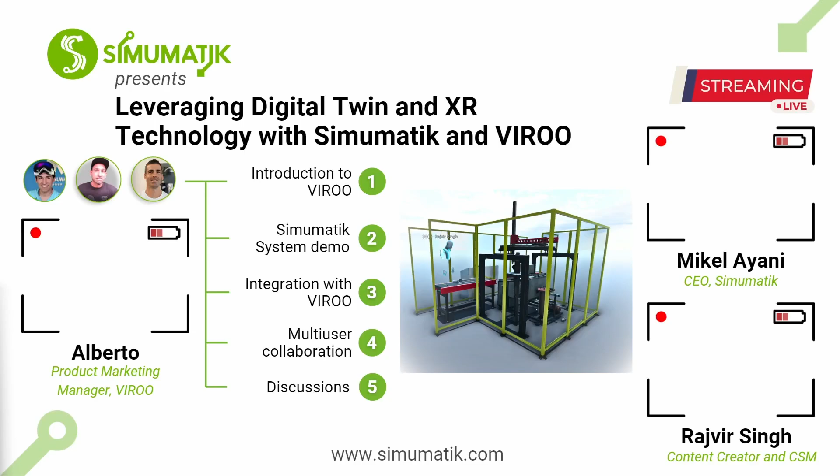Yes, we are live now. Hello, Mikel, nice to see you again. How are you? I'm good, thanks, and how are you? I'm fine, it's been a while for this webinar. We took, I think, 2 months break or 1 month. We also need vacation, right? Yeah, I was on vacation and you were on vacation too.

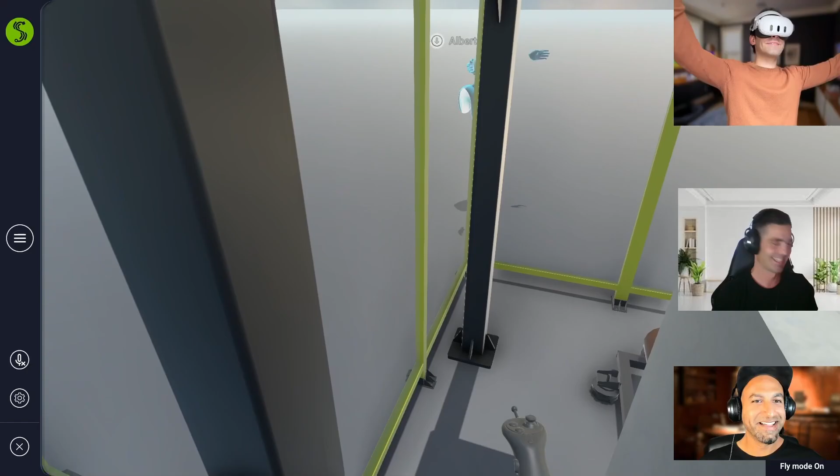Hi guys. Hi, everyone. Can you hear me? Yeah, I hear you. I think you need to disable the audio. Yeah, sorry about that, there's some echo.

Okay, so what you are seeing, everyone, is my screen. So we are in VIROO, a virtual reality application. I see you, Rajvir, as well. So Alberto is the guy we see in the screen and on the top right corner. He's inside using the VR goggles.

Hi, Alberto, how are you? I'm fine, thanks, it's a pleasure to be here. Thanks for having me, and hello to everyone that is going to join live today.

So Alberto, tell us who are you, what do you do for a living? Well, basically, as you said, I have like two lives now. One inside the metaverse, inside VR, but in real life I'm VIROO product marketing manager at Virtualware. We are a company that develops XR platforms for our clients. One of the coolest things that we do is the one thing that we are showing today, the integration with VIROO and Simumatik taking place live here.

And we are gonna tell the details about that later. So I think we can jump into today's agenda. Let's activate Alberto here as well. So Alberto is gonna tell us more details about VIROO. I think we all have our Google's virtual reality goggles - I don't think I'm gonna use them because I need to handle all this webinar thing. But we are gonna have a short presentation from Alberto. He's gonna tell us what we have just seen: an integration between Simumatik and VIROO. Then we are gonna tell a bit more about Simumatik for the audience that maybe doesn't know much about us. And then we are gonna tell the details about the integration, how it works. It's super easy, I have to say, it's super native.

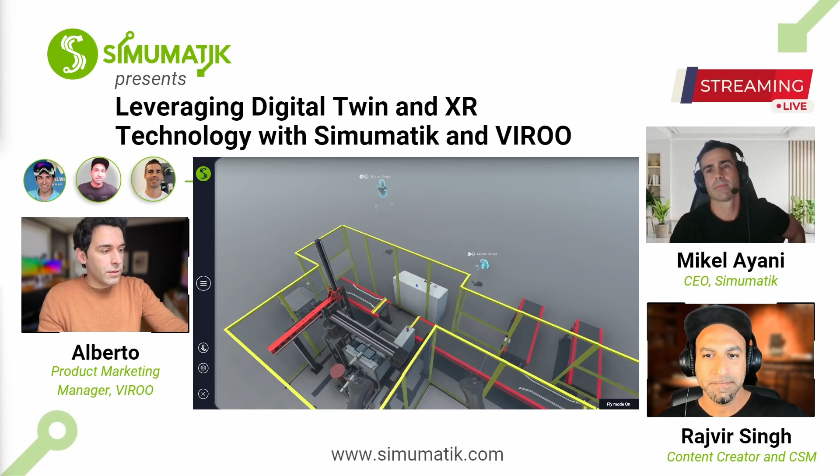Similar way, exactly. If you want, I'm showing you the screen right now because I have a 20-second video where we show when we went compatible with mixed reality. This is using the Vive XR Elite headset, because until now it's the only headset that gives us access to the camera when developing a PCVR application, since VIROO is still PCVR, not standalone.

But we believe other headsets in the market are going to be compatible with this. So what you're looking at now is a 3D model of the car, but the rest is our office. That's really cool because if you're in a large-scale immersive room, you have your partners on the side—it's better to look at them, not just avatars. That's why mixed reality is really cool.

And with the new Vive Focus Vision headset, we're going to be able to deploy this kind of technology to all our VIROO rooms, probably. Cool, nice, very nice.

Anyway, I think the avatars you're using are pretty cool, but what are you expecting in the future regarding the avatars? Is it going to be more advanced? Are we going to be able to see each other as a kind of virtual avatar of ourselves? Where's the technology going?

Yeah, we want to go with really simple, neutral avatars, but our clients could change that if they want, if they go inside Unity, because VIROO is Unity-based. So if you want to create your own custom content, you can go inside and change the entire model. But for many of our clients, it just fits—it tells you if the person is wearing a headset or not, or if he's just using keyboard and mouse.

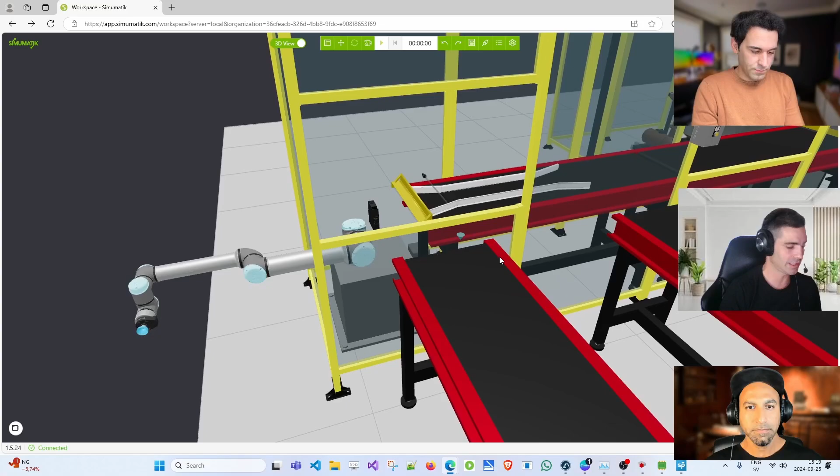Okay, let me share my screen quickly. I think we can go here. Yeah, okay, so this is the environment we just saw before. Here we have a machine that you created, Rajvir. Maybe you can tell us a bit more.

Yeah sure, so this was an extended version of the machine that I created. What's happening here, you can see on the right side we have an entry conveyor. If you can zoom it a little bit, that's where the product... Maybe actually we could go to...

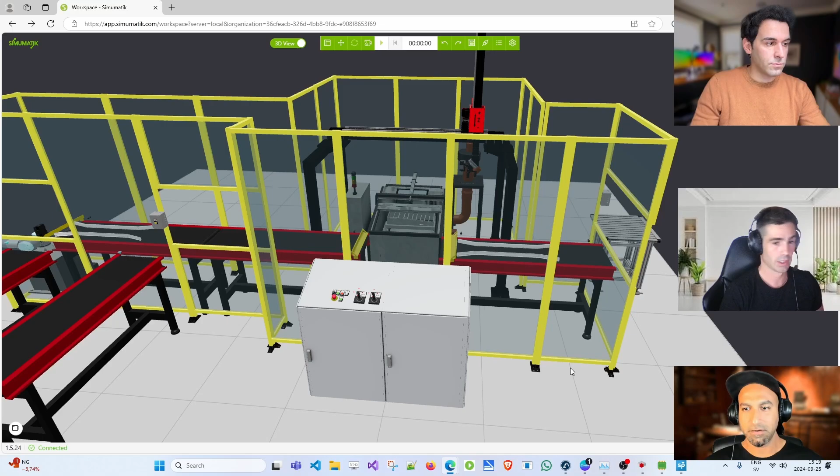Oh okay, yeah we can go to the virtual room, yeah, and we could do it, let me see. I jump into the session, and then we can see you while you are giving us a full tour. You can stand next to me and listen, so we can explain later the connection. Sorry, I need to mute the echo.

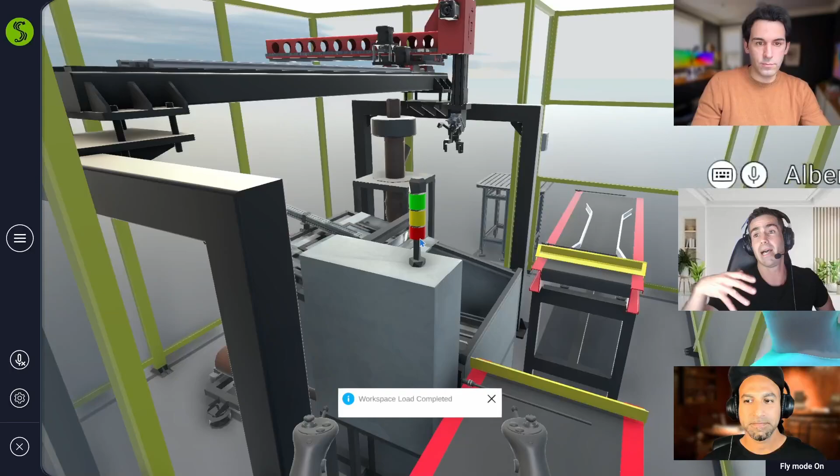Yeah, okay, so what you are seeing basically is how easy I just did it. We are going to tell the details later, but now the VIROO app, the VIROO Simumatik app, is just connecting to the workspace and showing what we have there. As you see, I'm sitting in my office and I don't have any VR set, but I can be inside, I can see you guys. I use the typical WASD keys on the keyboard so I can move around, and I see Alberto, I see you as well.

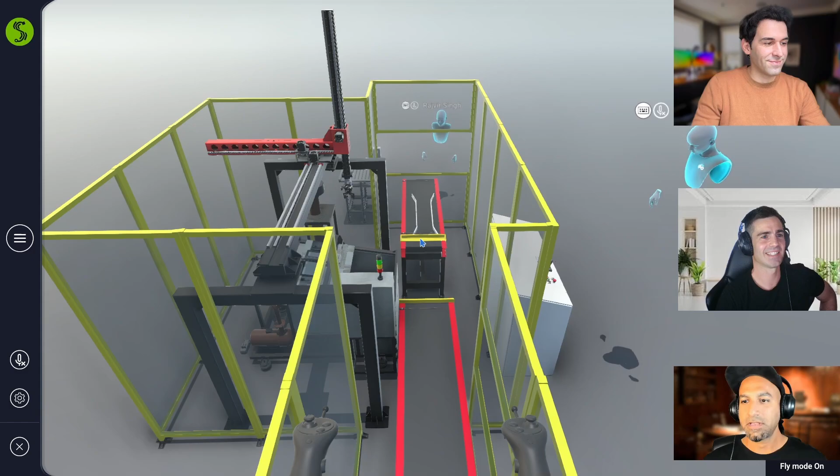So yeah, Rajvir, go ahead, we see you around now. So you can see my position here is basically the entry of the system where we have the products coming in. I will just come inside. You can see a sensor, which is just to sense the product and start the sequence.

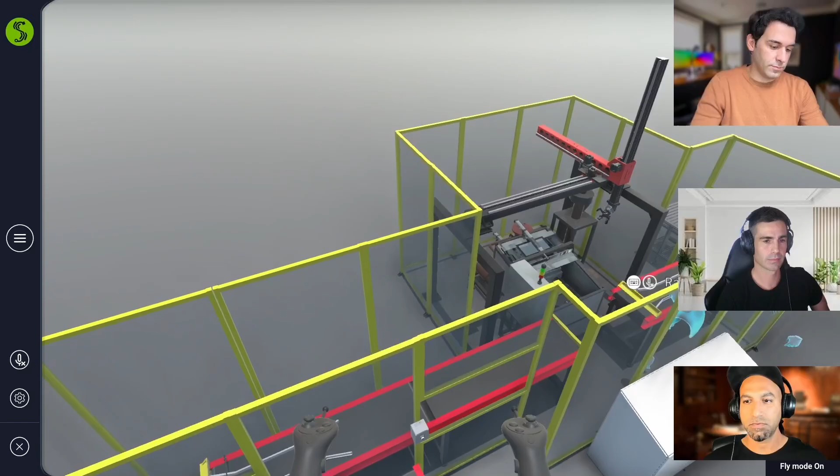And then here you can see the XYZ gantry, and this is used to wash the product. So products are coming here in the sensor, and then the product is picked, placed in the washing machine. There is a timing sequence which is going to wash the product, and then this gantry will pick that again, place it on another conveyor, and that will go further.

And here on the left side, we have a small window, it's for user inspection, it's just optional. If a user wants to pick the product and check by himself if it's okay, he can take it. Otherwise he can also place it on this conveyor, and if he doesn't want to take the product, he can let the product go.

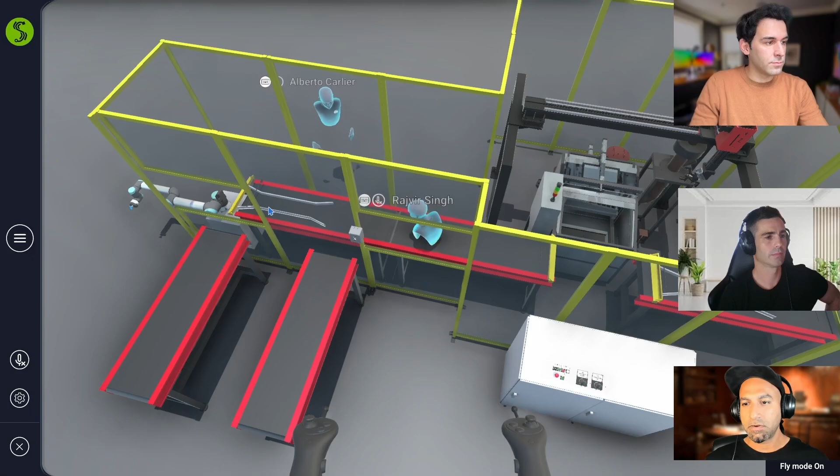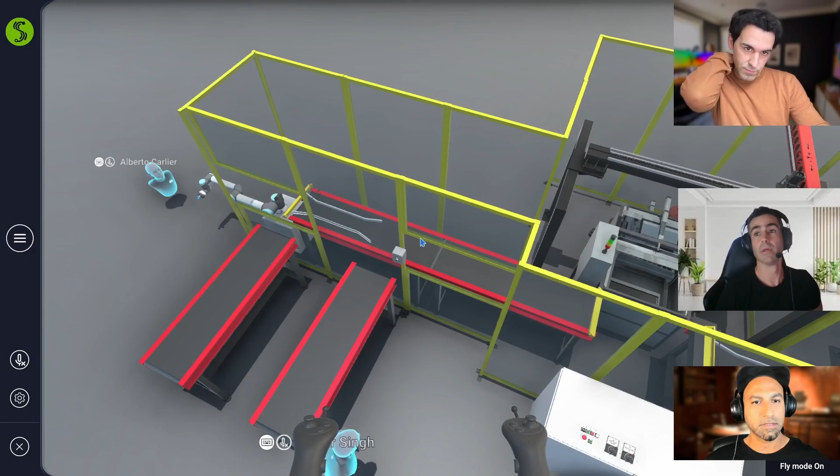And in the end you have a UR robot which is going to pick and place a product in a box, which will appear when we start the system. So maybe you can start the system, and then you can see everything. So I don't have the controls to interact with the workspace here.

But I can go to Simumatik, and here you see basically the same. Actually, let me show you this again, and then I think I can do like this. We can see it's basically the same. I don't see you guys in Simumatik, but we are seeing exactly the same thing.

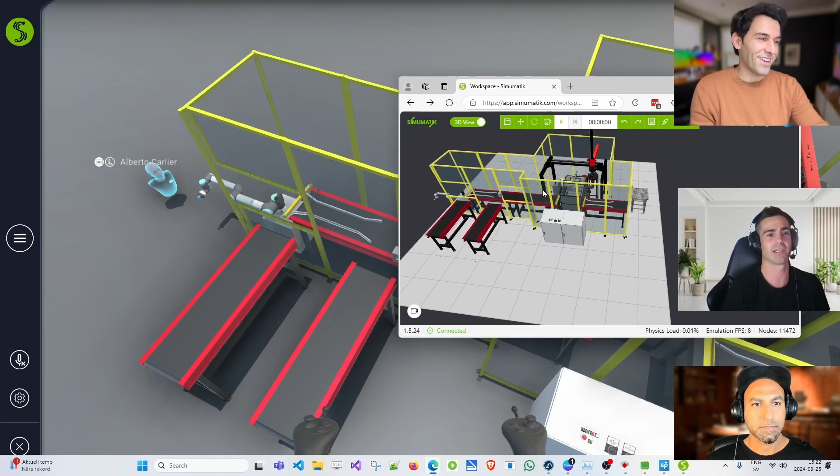Right, so what I'm going to do is I'm going to run, I'm going to start the PLC. I think we actually had a webinar about this before, so I'm not going into the details, but the PLC is controlled by Codesys, so I just downloaded the code.

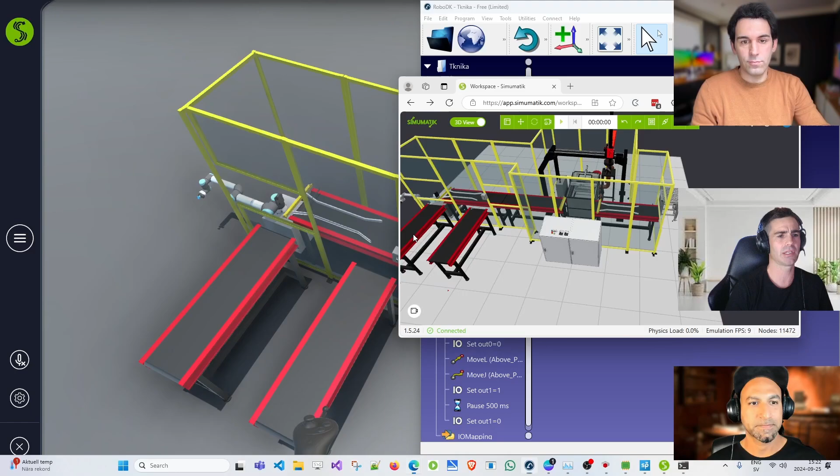So just to tell the audience, it's not an animation, it's a real code running in the soft PLC which is controlling the simulation. And we have RoboDK as well, I'm actually going to show a little bit this part.

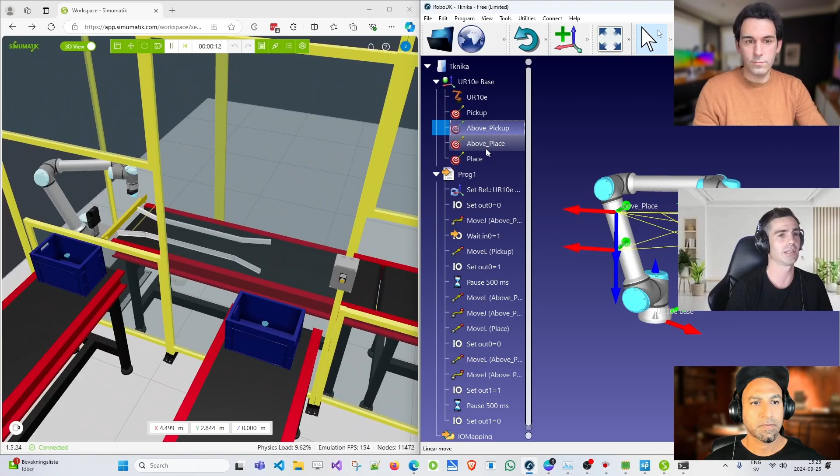So also for the audience that doesn't know about Simumatik, here we have the workspace. I click play, and suddenly the workspace has connected to both the PLC, which is going to control part of the system, and the robot. Just a very simple example here: if I zoom in, we can see that I can move the robot in RoboDK, and we see how it mirrors everything in Simumatik. So this is how Simumatik works.

It's, as you say, it's not an animation, the model is not done in Unity. It's done in our own platform with all the physics and so on, plus the communication, so it can be controlled with the different controllers.

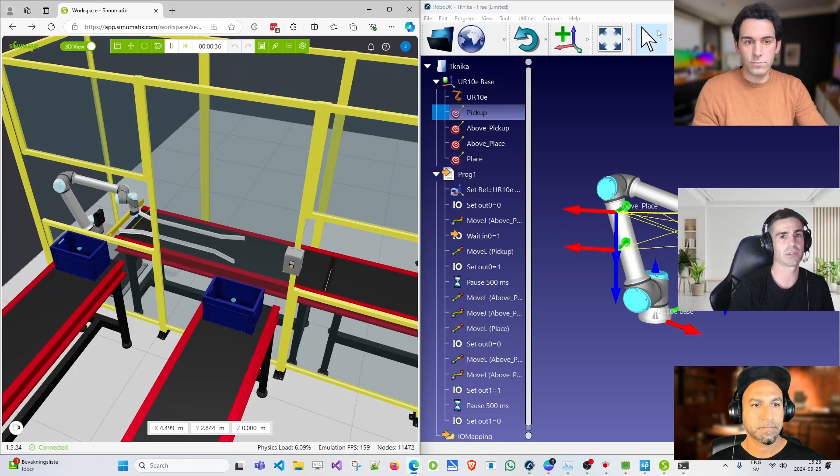So now we have the system up and running. I think I can just hide this because we can keep playing. You can maybe start the system and it's started, so I can actually interact from here, or Rajvir, if you want, you can.

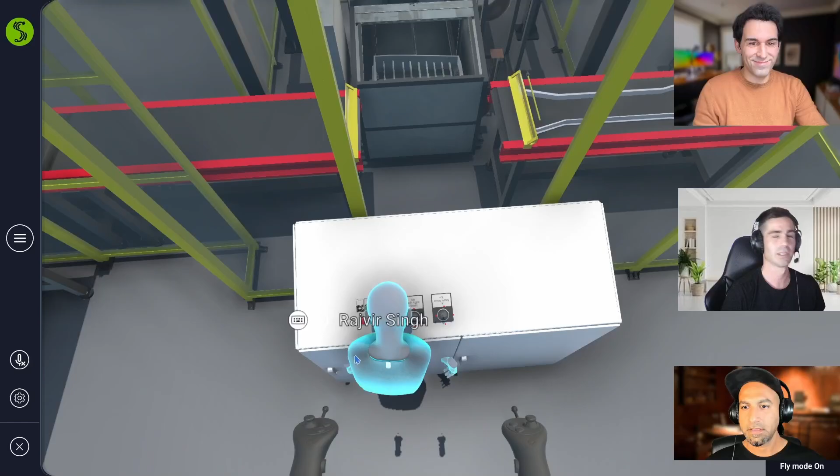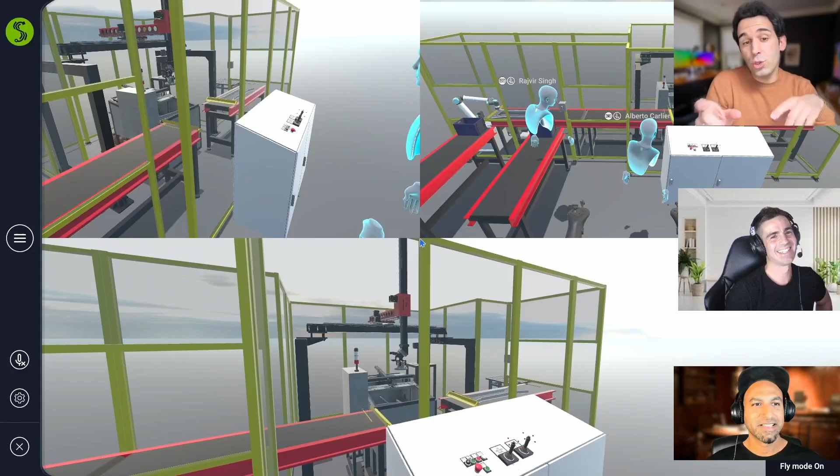If you want, there's a bonus feature in the single player app. If you press the plus key, you're going to see the screen divided, and you have the POV of each person joining the session. If you want to interact, you have to press the minus key to go back to the interact mode. This is a way that maybe a spectator can have a whole look of everyone that is joining the session and see what they are doing exactly.

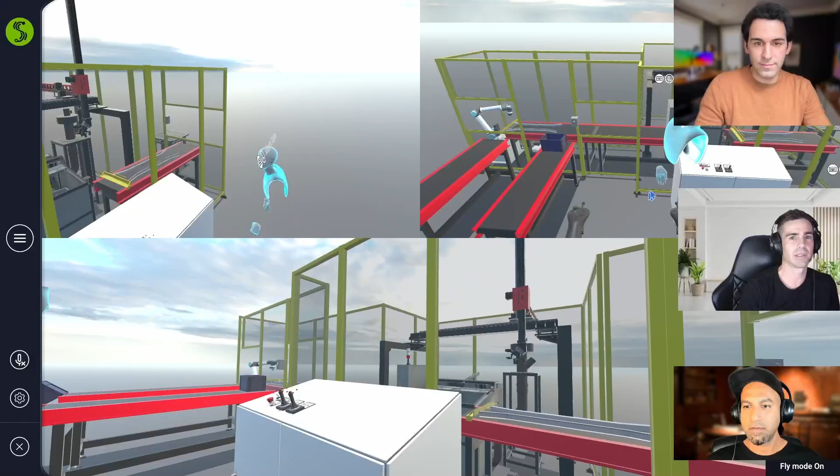Okay, so I'm the one in the top right, and then who is this one? Who is the one in the bottom? I'm looking at the bottom right now. The red one. Okay, and then here we have. I'm next to... So what just happened? Let's see, I can bring more and more, please. It's okay.

So here comes another one. So actually, I think, how do I go back? The minus key. The minus key, okay, minus key.

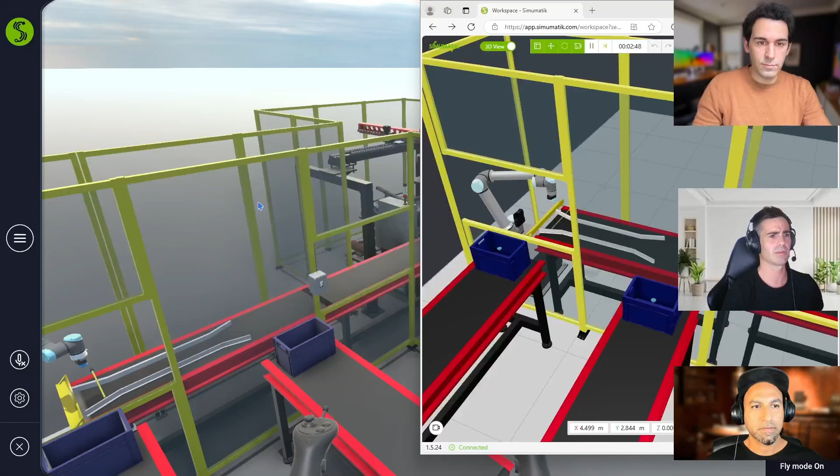So yeah, actually, I wanted to show something here. I wanted to show that the update is equally happening at the same time, both in Simumatik and VIROO. Okay, so let me see, maybe this is not the best view. I'm gonna move myself a little bit, and then maybe we can see the same perspective. I hope people are not getting sick watching me. But you see that the robot is moving, right? Yeah, it looks great, at the same time.

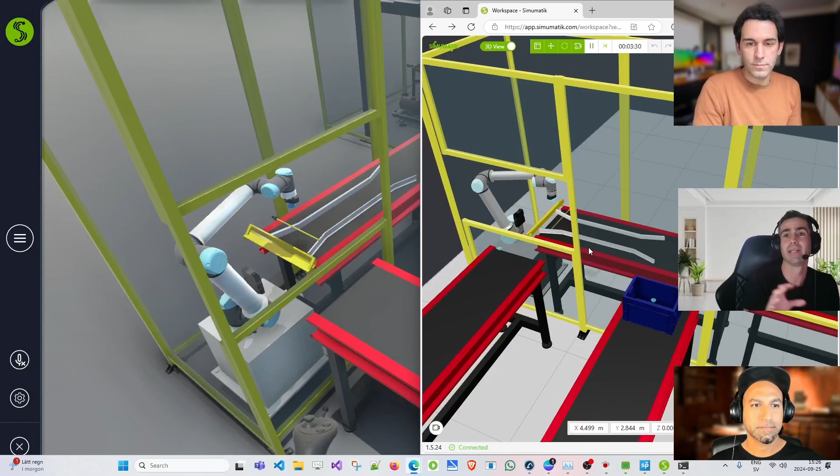And this is because you guys did a great job. You are using the native communication, the same API that our app is using to get information from the workspace, is what you are doing. So the refresh from the viewer side is equally fast. So both are showing real time what is happening in the model.

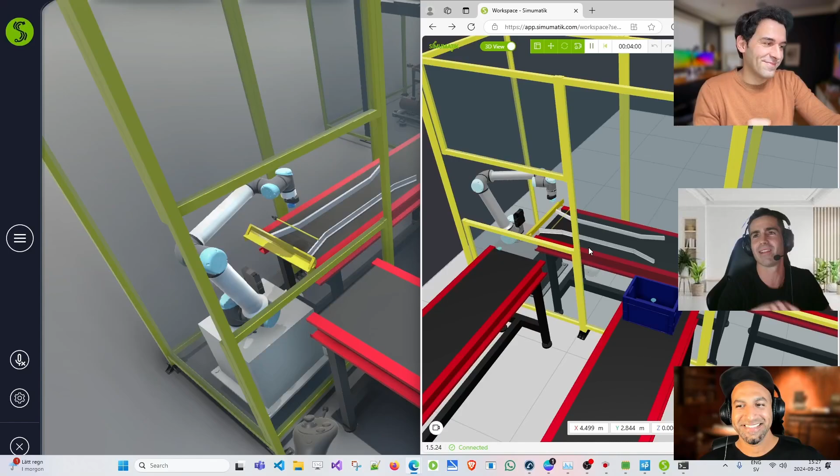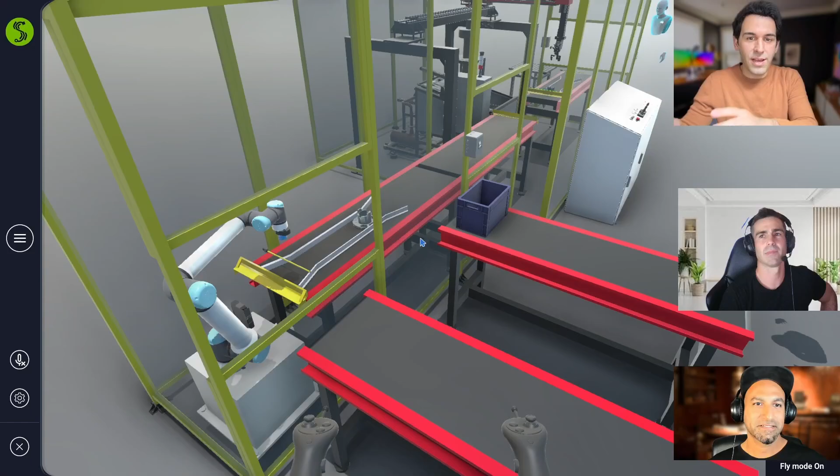It could be, I guess, maybe you know more about the delays when you are connecting abroad, because we didn't mention, but Rajvir, you are in Germany, right? And Alberto, you are in Spain, and the audience is seeing our cameras, yeah, it's cool, but we are all together in the same virtual environment, and this is thanks to VIROO. So I have to tell you guys, I've been in XR for almost a decade now, and it still blows my mind every day that what we are seeing right now is like the virtual representation of a real robot that can be in the factory, and it is connected to a virtual environment with many users at the same time. It's still, I think, amazing.

It's really, really cool. I mean, but we can also imagine the code we are using is real code. This could be a running code in the machine or in the factory. It could be a real factory simulated in Simumatik, and then we can have multi-collaboration.

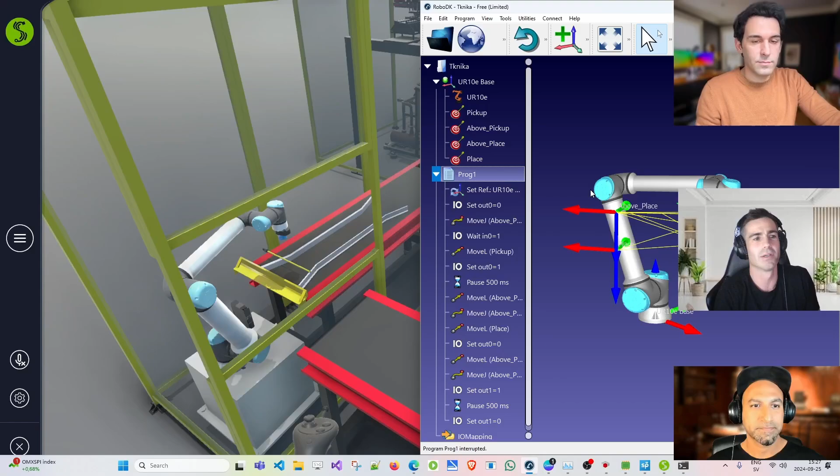Yeah, actually now if I want, I can just stop the robot. And now the system is not gonna run as it was doing. I mean, or I could do some modification. Now the robot won't pick the piece, because I just stopped the robot. The PLC is still running and controlling, but I can manually move the robot here. I can tell the robot to go to different places, but it's not active. So that's the Simumatik part.

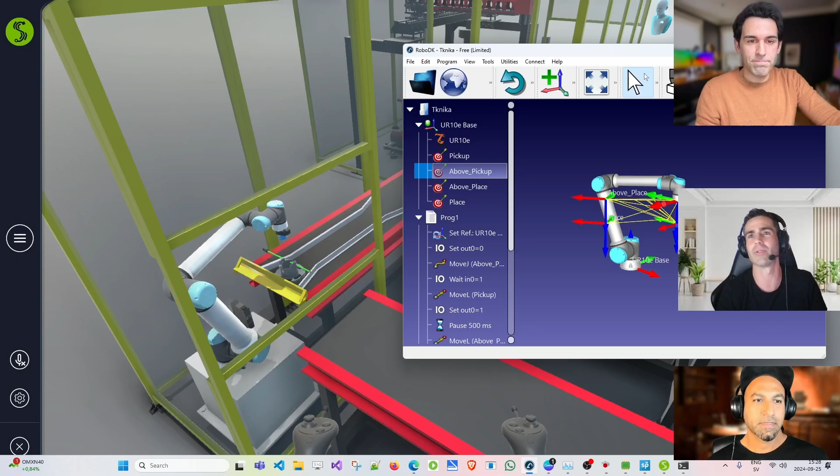But I agree, Alberto, it's amazing that suddenly we are collaborating remotely and we can play together, and this opens a lot of new possibilities, even for us and our customers.

So let me see, I want to go back to our agenda. Now that we have seen both what VIROO can do and what Simumatik can do, maybe we can tell a little bit to the audience how easy it is to integrate this. Maybe you can tell a little bit about the VIROO app. I'm gonna close what I have. But Alberto, what's the VIROO app? It's just something that you download, your customers can download.

So this is a single player application. I'm going to close it just to see how the process is. This is something you will download from the web if you become a VIROO client. This is a desktop application, and it's going to allow you both to create new sessions or join existing ones. You join with your credentials, just put your name and password. It's going to connect to your cloud to see all the content and even list all the available sessions that other people in your organization are taking right now.

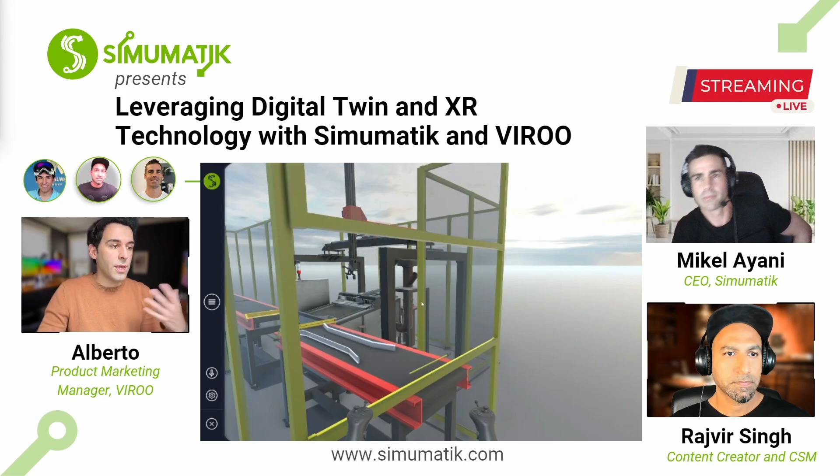So in this case, it's going to load and establish that connection through the API mentioned before, and load all the 3D models. We found Simumatik some months ago. We thought it was a really powerful app, but we thought it would be even more powerful if we had the chance to make it multi-user and VR, because in VR, no matter how many times you see this on your desktop, when you put the headset on, all the sizes are different - it becomes natural, 1-to-1 scale. Some things you probably thought were really small now look natural. It's a whole new way to interact.

As you can see, in a matter of seconds we have the live 3D model operating, and you can even start to interact depending on all the actions that have been prepared. This is another great thing about VIROO - before I talk about how it can be applied across all the value chains of a company, this could just be for design review or prototyping. But maybe now that you have this 3D model, imagine you want to develop a training simulator that trains people how to operate this kind of machinery.

You could bring that to Unity. You can establish all the actions and interactions using our no-code system, and they could go live inside your own application, launched through the single player. This could be as easy as jumping like this, or you can go further, making a more complex application if you want. Actually, as you mentioned, I see many of our customers...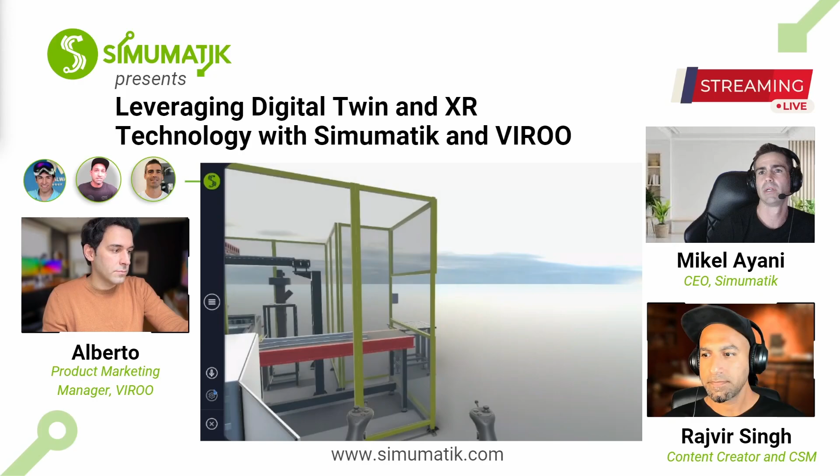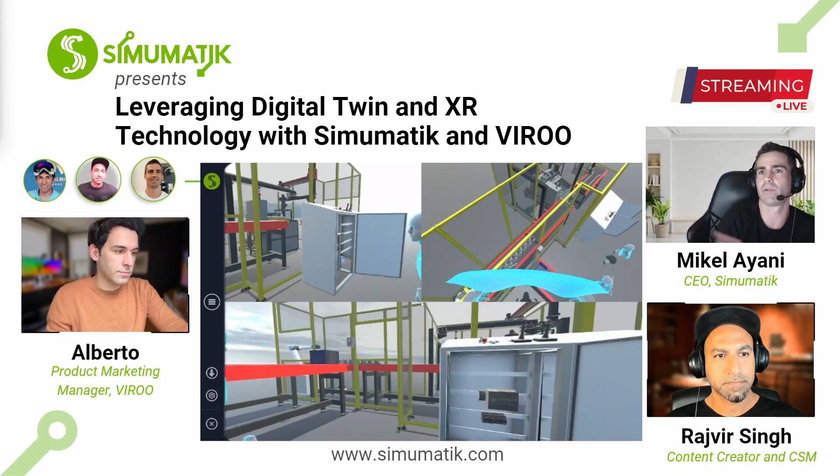A lot of customers have asked about VR application or VR compatibility with Simumatik before. We've been testing the system from the operator perspective, even doing a virtual factory acceptance test. Many of our customers deliver machines to end users, and many times you need to travel, go to the supplier, see the machine, and validate it. Now you could do it without traveling.

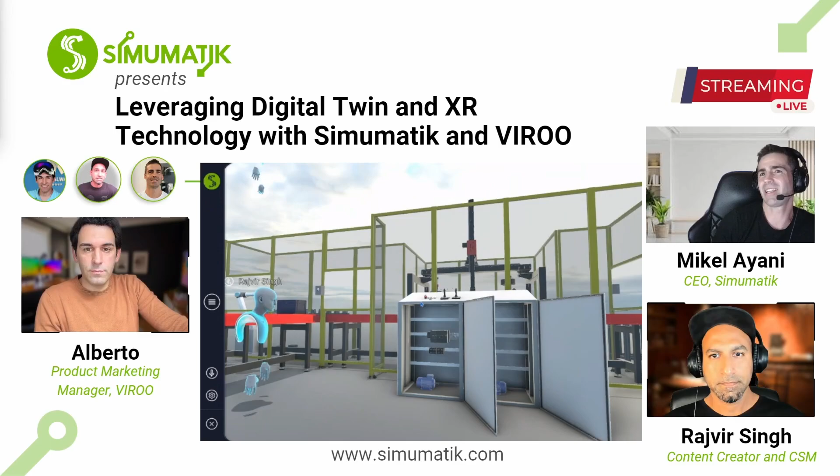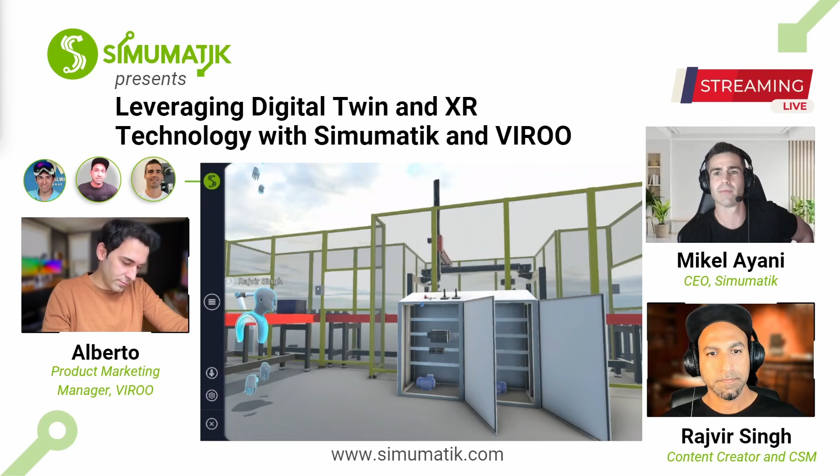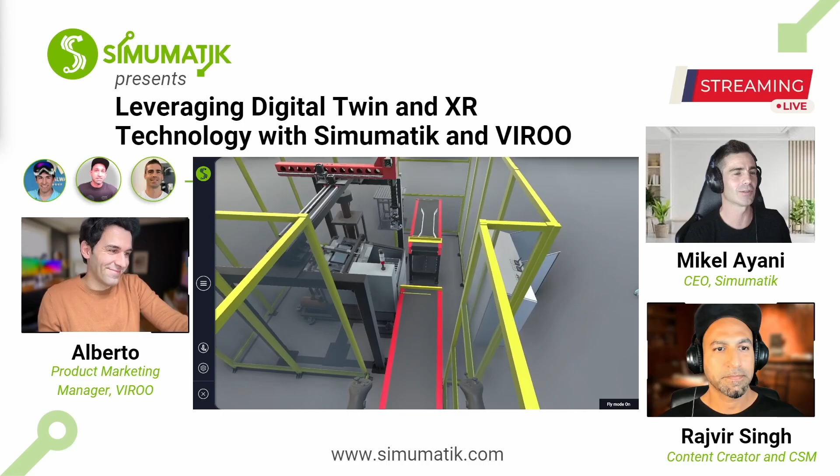You don't need to travel just to have a walkthrough or test from the functional perspective if the system is working well, but even from the maintenance perspective, if there's something you need to change, or a wall that's too tight. I think we don't have much space in this cell, so someone might complain about how to do maintenance here. So there's a lot of room for using this experience in other steps of the project life cycle for automated systems.

It's funny because this really happened to us at Virtualware. We were preparing a delivery to a client in Japan, building them a control center, and spent like 100 hours developing that on the monitor. Then we said, wait, since we have VR, why don't we bring the 3D model into VR to see it in full scale? When we were walking around the 3D model, we detected a gap between two doors that we hadn't noticed on the desktop. It was really cool, again like seeing it in real life.

And if you combine this with mixed reality, you can bring this system to the real workshop where it's going to be placed once finished. You can see if there's going to be room between this machine and other systems, or if there's a cabinet or something you need to move because it's in the way. I think it's great, it's a huge potential.

You can see that I stopped the robot, and now we have a queue of products there. And like you said about the factory acceptance test, I think on top of that you can also test the emergency response of your system without any risk. You can check what risks are involved in your system, and if there's an emergency situation, how can you react to it, how fast can you react. So it's also a very important way to test the system.

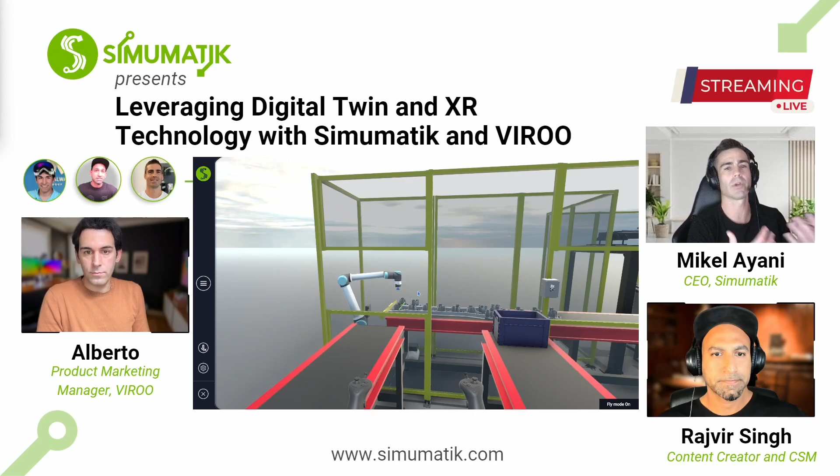We are seeing that more and more collaborative robot applications are implemented in industry, and this is just a demo we've done. But in this case, we could add some sensors, maybe a security sensor to detect if someone gets close to this robot arm, so you could slow it down or whatever, and actually test that. We haven't mentioned it yet, but very soon, I know your development team is working on that.

We will be able to grab products and do other stuff from VIROO. So in this system, where the operator could place the products at the beginning and grab them to put in the box manually, that could be tested, and we'll actually be able to detect when the operator gets close to a sensor. So it will be kind of a two-way interaction between the model and the user. It's going to be quite complex and useful.

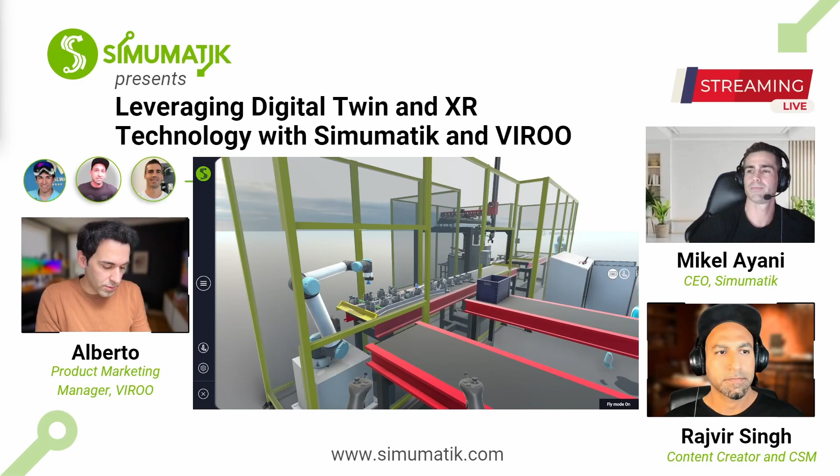I don't know if you want to go straight to that, but I'm taking some comments in the live chat, and there's a question from Victor Gapogonenko regarding this. He asked, if I've understood correctly, the VIROO application is based on Unity - it is, and the model is imported from Simumatik - that's correct as well.

So the transforms in Unity are synchronized with Simumatik, but what happens to the interactions in VIROO? Are they also synchronized with Simumatik? This is the one thing we were talking about, that's in testing. Because of the webinar, we didn't want to mess too much with it, but it's imminent. I know your development team is working on that feature, and probably we'll see it, if not by the end of this week, then next week.

Yeah, so exactly, we'll probably have another webinar regarding content creation with that interaction, so expect that very soon. And we even have a comment from Sergio Barrera, who is Virtualware's CTO.

He just confirmed that we already have Vive Focus Vision with mixed reality working in VIROO. So we have this 3D model inside our office or whatever space we want. I think that one we need to do, but we need more space. I cannot do it in my living room, not with this machine at least, but maybe something else we could do.

Maybe you could join from your facilities one day, Alberto, and we could do some mixed reality. I think in that case it's also possible to scale up the system. You can scale it down to a smaller place, or scale it up. You lose some of the one-to-one scale benefits, of course. The bad thing about mixed reality is that normally you understand more how small your house is, because with some of these models you cannot.

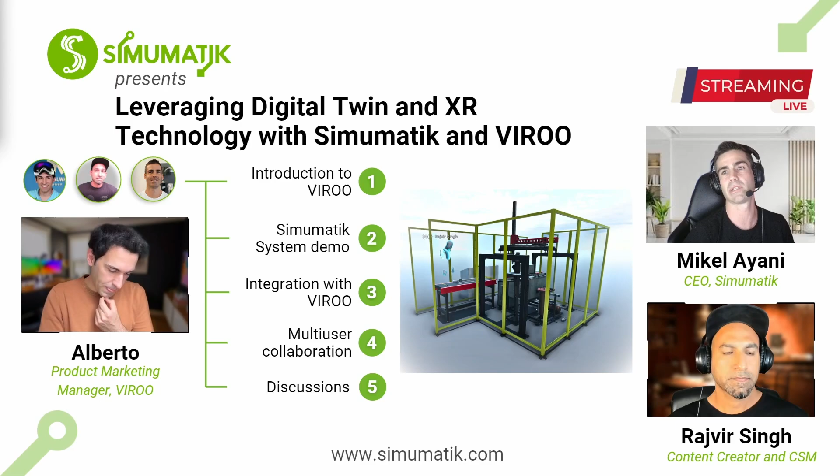Before we finish, about the benefits of combining both VIROO and Simumatik: we have discussed some topics from the industry perspective, but even in education, I will say they make a really good match, because these skills that we are showing here, PLC programming, robotics, and so on, are requested in the industry. If you ask ChatGPT now which will be the future engineering works, they list digital twin experts, VR, XR experts, and so on. Even if the students may see this more like a game or cool experience, they are getting prepared for industrial applications of the future.

I think just doing simple virtual commissioning, jumping into these models or these virtual environments, playing around, discussing different designs and so on, is providing these skills that the industry is requiring. So it's just on a lower scale, simpler applications, but I see a lot of benefits.

I also see that in education, besides training and educating people, you can also do exams in VR. So you have a teacher here, and the students are jumping in, and they're having a live exam on this real system. So a lot of ways to use VR in the education area.

Of course, and as we know with Simumatik, having distance courses and so on, now with this it makes it even easier to have a nice environment to communicate and see each other. It's really cool. So what do you think?

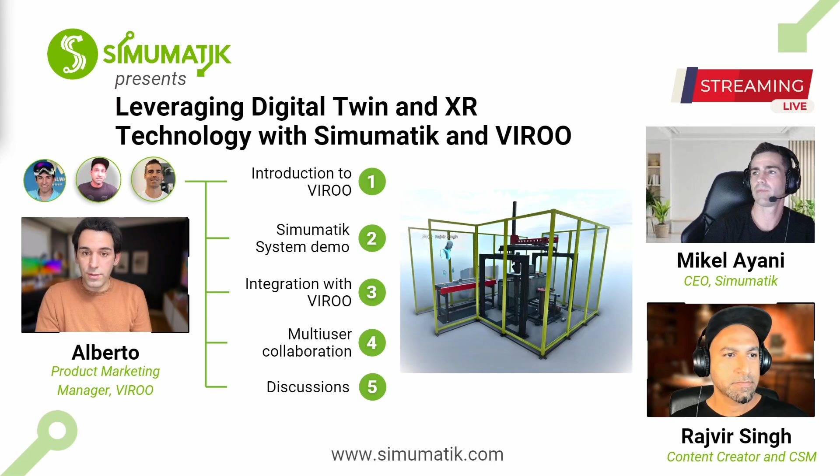I think it went really great. Looking forward to the next one when we show interactions. When we talk about XR, this is one of the main use cases that really makes sense - having real digital twins, one in the factory, the other in the computer, and then in the virtual environment where many people can join from around the world. This is one of the reasons I am working in this sector, because I really love this kind of interaction. Great job to Simumatik for making this and loving this integration with VIROO.

Yeah, we are super happy. This is great, and it's been amazing for us. We have been struggling quite a lot with virtual reality, because our users know we have had this feature as a beta version, but as I mentioned before, taking care of all the updates in the APIs and all the hardware coming with new features - better to leave it to the experts, like you guys, and we did this integration that is amazing. I also love how easy it was for Alberto to jump in directly and change the headset to a keyboard, without any bugs, without any delays. It was amazing how easy you guys made it to integrate Simumatik and VIROO.